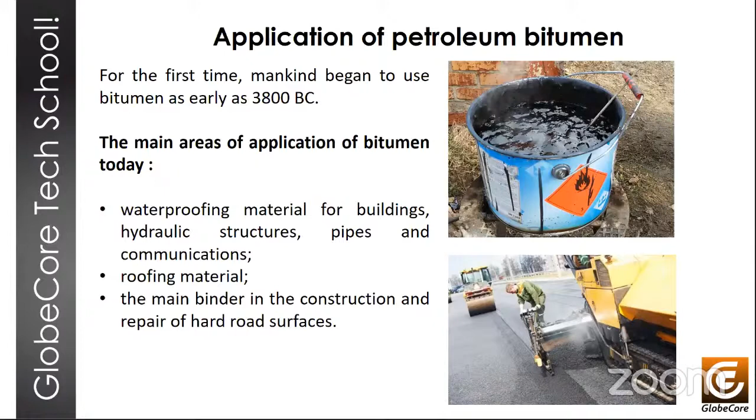So currently, bitumen is widely used in construction, in various industries, in agriculture, and for radiation shielding of all things. That's interesting. So the leading field, however, of bitumen application is the construction and repair of roads, buildings, industrial facilities, and also airports. Next slide, please.

So, okay, under normal conditions, if we are talking about a temperature of 20 to say 30 degrees centigrade, bitumen is a solid or highly viscous material that cannot be easily applied to things, right? It's solid. So in order to be able to use it, it must be converted into a liquid. And we can do this in one of three ways.

So first we can heat it, and between 100 to 200 degrees Celsius, bitumen turns kind of liquid, and it becomes more convenient to be mixed with mineral materials. So something like preparing asphalt concrete mixtures, or for application in its straight form on road surfaces when we do priming layers and asphalt pavements.

And asphalt concrete mixtures prepared with hot bitumen, as a rule, are stored, transported, and applied hot, with the possible exception of cold stored bitumen mineral mixtures, which are prepared with heating but stored and applied cold.

Another way we can have bitumen liquid is by diluting it or dissolving it with refined light oil products. So in this case, viscous bitumen is mixed with petroleum-based products such as kerosene or diesel fuel, gasoline, etc., and thus it becomes a liquid.

And the third way to have our bitumen in a liquid form is to emulsify it with water, adding an emulsifier, a surfactant. And when we emulsify bitumen, we get the emulsion, which remains liquid even under normal ordinary temperatures of about 20, 30 degrees Celsius.

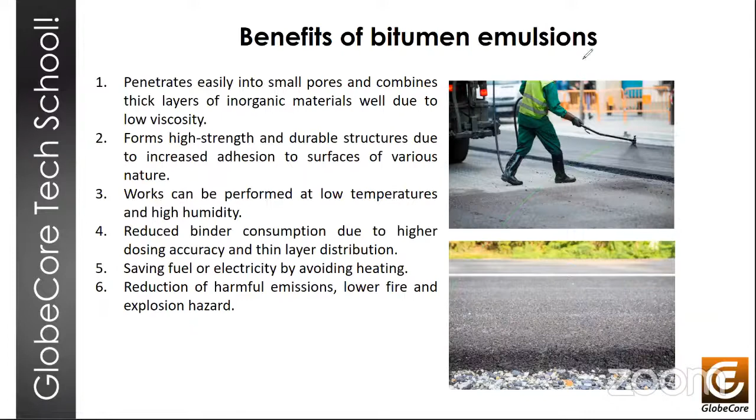Thank you. Okay, so what is this bitumen emulsion we speak of? So an emulsion is a dispersed colloidal system of two immiscible liquids, of two phases, one of which is distributed in the form of small drops in the other. In the event that one of the phases is water and the second phase is a non-polar or low polarity liquid, and for the purpose of this webinar, we're going to call it oil.

So bituminous emulsion, or water bitumen emulsion, is a dark brown liquid. It's made by dispersing bitumen in water. And this process is counteracted by the internal cohesion and viscosity of bitumen, as well as by the surface tension force, which resists the formation of a new interface. So when this mixing process is stopped, the emulsion quickly breaks and bitumen particles can merge, and this is called coalescence.

Okay, so to keep the components mixed and to keep the emulsion stable, an emulsifier is introduced into the emulsion, and it is a surfactant that prevents or slows down the separation of these two phases. The emulsifier molecule is polar. Its tail is compatible with bitumen particles, attracted to bitumen particles. And the other side of the molecule, its head, is repelled by other emulsifier molecules. So that prevents bitumen particles from joining together, which ensures the suspended state of the bitumen particles and ensures the stability of our emulsion.

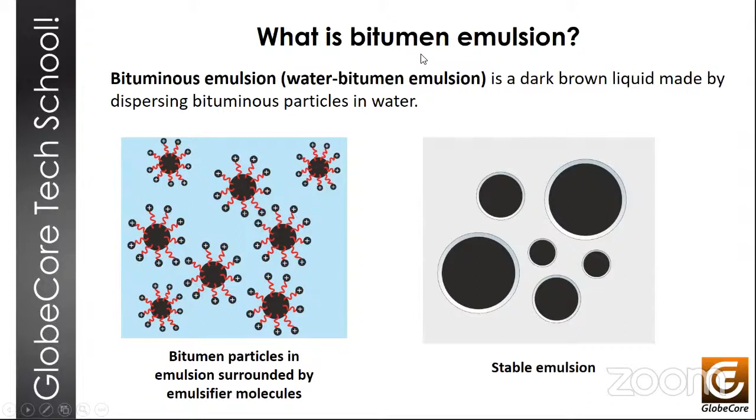So, okay, ingredients. In addition to bitumen, water, and an emulsifier, the emulsion may contain a stabilizer, acid or alkali, as the case may be. It can contain various solvents and thinners as well. So the acid is needed to improve the stability of the emulsion. And in most cases, we'd use hydrochloric acid or orthophosphoric acid, maybe acetic acid. And in the case of anionic emulsions, however, we use alkalis, not acids. Okay.

Stabilizers. Stabilizers are used to reduce the changes in the physical and chemical properties of the emulsion during storage and use. And that would likely be something like 0.05 to 0.1% of a 30 to 35% calcium chloride solution by weight. Solvents or thinners, that is a light oil fraction with a boiling point of 140 to 220 degrees centigrade. It's added in the amount of maybe 0.5% to 3%, and it's used to help create a homogeneous system.

Thinners, such as vacuum gas oils, oil fractions, etc., are added in a wide range, anywhere from 5 to 30% by weight, to increase the penetration of bitumen to the required value and to give the emulsion a stable liquid state. To improve the adhesive properties of the finished emulsion, we can add an adhesive additive.

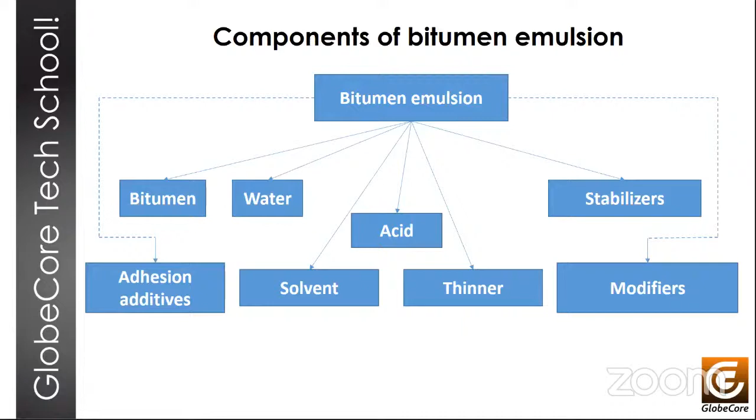All right, so let's classify bitumen emulsions. Depending on the nature of the liquid in the composition of the emulsion phases, we have direct emulsions, or oil in water emulsions. This is when bitumen droplets, the dispersed phase, are dispersed in water, which is called the dispersion medium, in the form of tiny droplets from 1 to 10 microns in size, surrounded, like I mentioned, by a layer of an emulsifier.

The opposite, indirect type is water in oil emulsions, when water is the dispersed phase and is dispersed in bitumen, which is the dispersion medium in this case. Water droplets in this type of emulsion are also stabilized by a layer of emulsifier. It should be noted that during production, both types of emulsions can form simultaneously, especially if using double-purpose emulsifiers. Such emulsions are sometimes called combined.

So what type of emulsion will eventually turn out will depend on the nature of the bitumen, the pH of the water phase, and the ratio of the volume of the phases. In order for the emulsifier to function as a surfactant at the oil-water interface, to be adsorbed, it must have an affinity of the same order for both phases. If this condition is not met, the emulsifier will move from the interface to the phase for which its affinity is greater.

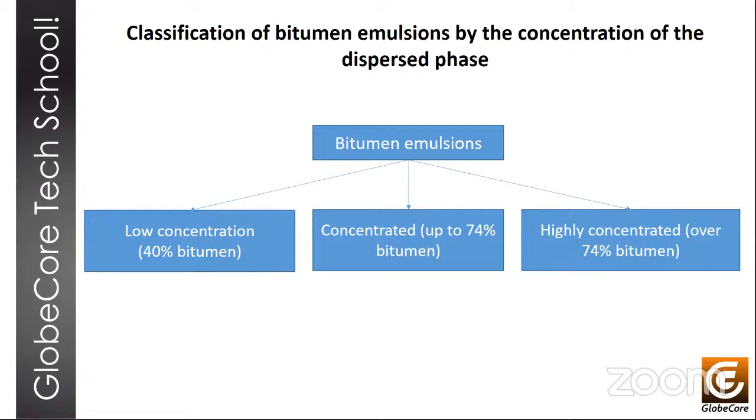Also, we can classify emulsions depending on the nature of the emulsifier. Direct type emulsions are usually divided into the following classes. There are anionic emulsions, where an anionic surfactant is used. There are cationic emulsions with the cationic surfactant. There are amphoteric emulsions with double-purpose emulsifiers, and these are compounds that ionize and act differently in water solutions

depending on the pH. They exhibit the properties of cationic surfactants in an acidic solution, and they become anionic surfactants in an alkaline solution. Then there are non-ionic types, which have surface active properties, not dissociating into ions in water solutions. And there are emulsions based on solid emulsifiers.

Now, emulsions of the inverse type, depending on the nature of the emulsifier, were usually not separated into classes. But now, when it became possible to choose from a wide range of various emulsifiers, we can also divide them into surfactant emulsions, solid emulsifier emulsions, and emulsions based on non-ionic emulsifiers.

And this type of inverse emulsion is still under development, but it has prospects, especially in the case of using an emulsifier that is sensitive to temperature change during the preparation or application of the emulsion. So there are some promising applications there.

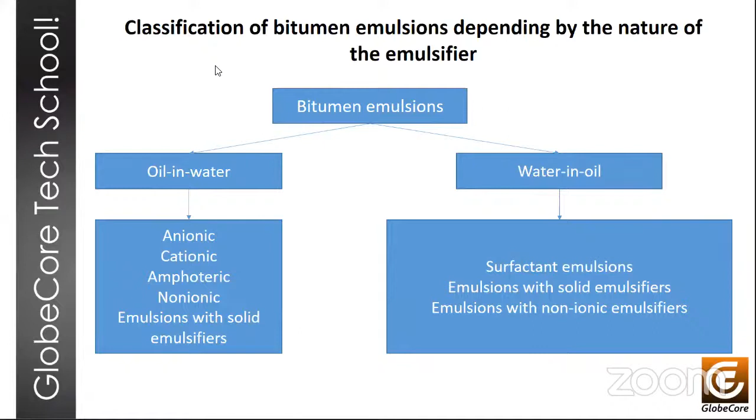All right, so in road construction practice, the most commonly used emulsions are direct type, oil in water, primarily anionic or cationic. And therefore, the classification of these emulsions, for example in the United States, is based on such an important characteristic of their properties as the rate of mixture formation based on these emulsions.

Or the rate of breaking of the emulsions. So basically how soon the bitumen released from the emulsion when it breaks achieves its original properties and forms a continuous film. So we can have rapid setting, RS, medium setting, MS, slow setting, SS, and superstable emulsions, QS.

And for convenience of classification, a special international system of symbols for the designation of an emulsion has been developed, and it makes it easier for users to choose the required type and grade of bitumen emulsion.

And we're talking about standards such as the ASTM D977, D2397, there is AASHTO M140, and M208.

So first of all, the type of emulsion is indicated by the rate of its breaking or setting. For example, a rapidly setting emulsion will be designated RS. Then either the letter C is put in front of the type of the emulsion, which would mean a cationic emulsion, or no letter is put before the designation, and that means that it's anionic. So RS would mean a fast anionic emulsion, CRS would mean a fast cationic emulsion.

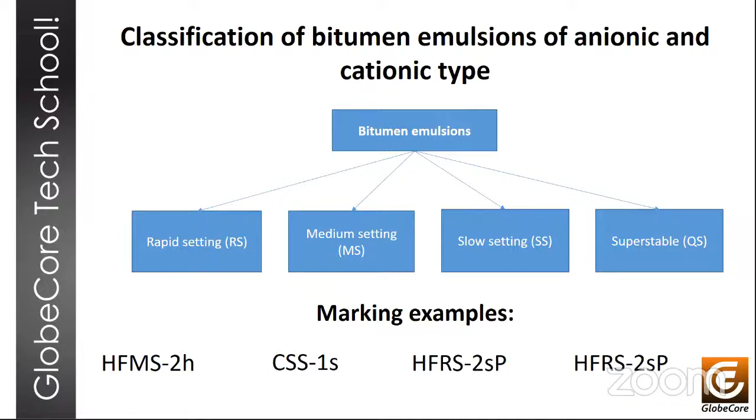The purpose of bitumen emulsion is determined by its properties. It easily applies to various surfaces, including vertical surfaces, and due to its low viscosity, it penetrates into the pores of materials. It also mixes very well with mineral materials, such as crushed stone, gravel, sand, or mineral powders of various kinds, firmly binding them together.

Bitumen emulsions perform two main functions. The binding function is the use of an emulsion to bind mineral materials and their particles together, which is a prerequisite for the production of asphalt mixtures. There is also the protective function, which serves to protect materials and surfaces from the effects of aggressive materials or media, such as water or salt.

In road construction, bitumen emulsions are used for the construction of crushed stone surfaces and gravel roads by impregnation method, by pre-mixing, and by mixing on the road itself. They are also used for the construction of asphalt concrete pavements, and for treatment of dirt roads if necessary.

Bitumen emulsions can also be used for a wide range of road construction works. This includes surface treatment, cold emulsion mineral mixtures produced both in the mixer at the factory and by mixing straight on the road, cold storage mixes, tack layers, pothole patch repairs, and creation of thin film protection layers.

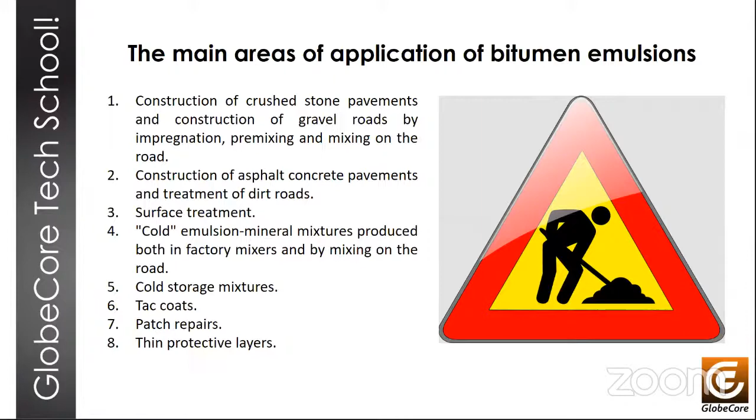Extensive experience shows that the most effective use of bitumen emulsions is in the so-called cold technologies for the construction and repair of roads. First, we'll talk about priming coats.

Priming is the application of an emulsion by spraying it onto the surface in the form of a thin layer, which ensures reliable adhesion of the asphalt concrete mixtures to the underlying layer. For most types of pavement, such as concrete or various basic and bottom pavement layers, the creation of this binding layer is not only desirable but necessary.

One type of priming is the application of the so-called initial coating, when a slow emulsion with a bitumen content of 55 to 60% is sprayed onto a granular base to prepare it for the application of an asphalt concrete mix. Depending on the properties of the base, the specific amount of emulsion applied would be maybe 0.4 to 1.4 liters per square meter.

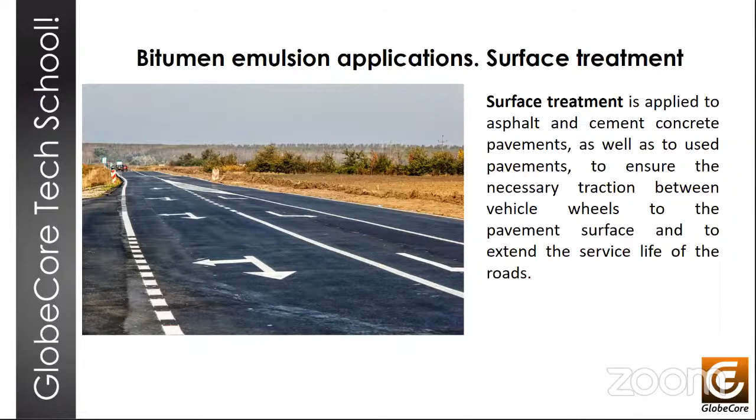Crushed stone impregnation is another use. Construction of structural layers, bases, and coatings by multiple scattering of crushed stone of various fractions, compaction of such stone, and also impregnation with bitumen, usually twice, with a slow breaking emulsion that contains 50 to 65% bitumen.

And there are patch repairs. The use of bitumen emulsions greatly simplifies the repair process. It allows work to start in early spring and end in late autumn, especially in moderate climates like where we are. It can be used at air temperatures as low as 5 degrees Celsius.

When using emulsions, it becomes possible to use them on wet materials, because cationic bitumen emulsions ensure fast formation of the binder film. They show high adhesion of the film to the surface of most aggregates, and overall we get good quality repair works. The emulsion consumption in this case would be 1.3 to 1.6 liters per square meter for each centimeter of depth cut from the original surface.

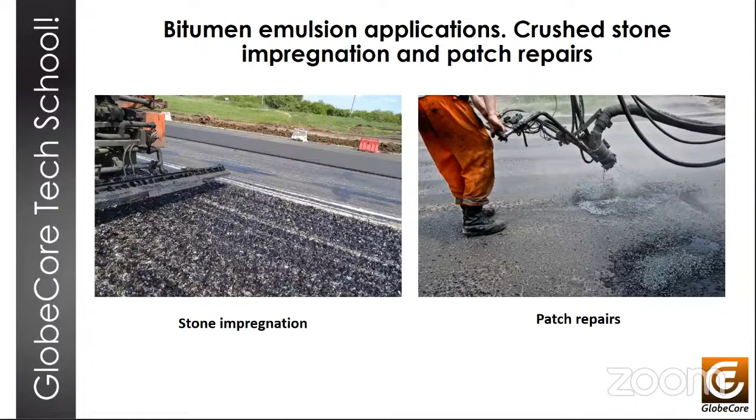In addition, emulsions are widely used in other technology processes that include slurry seal, microsurfacing, multimac, and cold recycling. Slurry seal is a method of applying thin layers over existing pavement. This cold mixture consists of a dense mineral material with a filler, usually Portland cement, mixed to a uniform consistency with a bitumen emulsion and water.

After the so-called drying time, the surface becomes impermeable to water, and the coefficient of traction is improved. So the old coat is protected from water, oxidation, and further breaking and deterioration. The thickness of the slurry seal coat is 1 to 1.5 times the size of the stone grain, so up to about 8 millimeters. This mixture uses material homogeneous in terms of particle size distribution.

When increasing thickness to improve mechanical properties and shear stability, latex modifiers are applied. The mixture has high surface tension and is self-leveling. With the help of slurry seal, slight rutting and any longitudinal deformations of the profile can be compensated and repaired.

Since there are practically no voids in the hardened mass, it resists compression really well under traffic. After the coating is done, traffic can be resumed after about 1 to 4 hours.

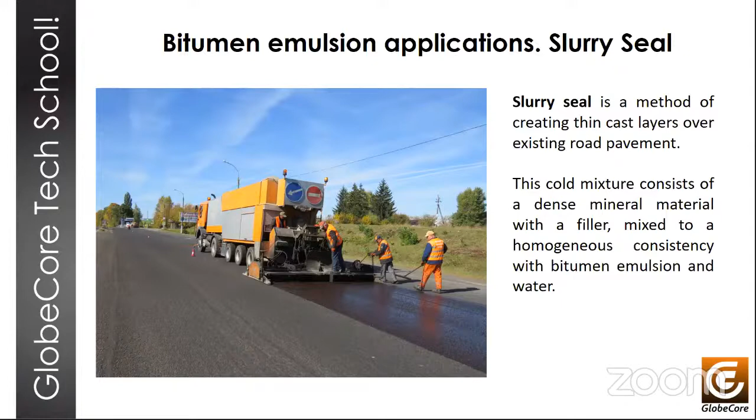With microsurface technology, a larger stone material is used, and the bond is actually stronger than slurry seal, so the coating can withstand fairly heavy loads without deformation. For better shear stability, again, latex is introduced into the mix.

Microsurfacing is used to eliminate rutting, fix minor profile defects, and expand road shoulders. Basically, in any case where slurry seal can be used, microsurface can be used as well.

Microsurfacing emulsions could be called fast traffic emulsions, as they set in just 30 to 60 minutes. If the coat is created in 2 passes, the first layer closes the cracks and smooths out the surface, and the second coat is recommended to be applied no earlier than 1 day later.

When the repair is completed, traffic can be resumed in about 30 minutes. However, for 1 hour, the driving speed should be limited to about 40 kilometers per hour. Both slurry seal and microsurfacing imply a fairly quick application at a speed of 3 to 6 kilometers per hour, and both technologies allow quick restoration of the road surface.

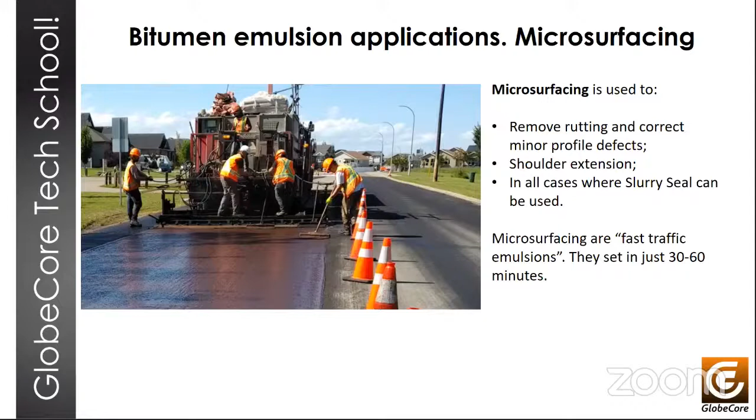Both act as a protective layer to prevent wear on top of the road, and can withstand fairly heavy loads and traffic intensities. Their average service life is about 3 years.

Next is Multimac. It's a thin layer coating that functions as a protective layer or wear layer. It cements the damaged base, fills all cracks and voids with the bitumen mineral mixture, and evens out deformed pavement. The mixture is prepared and distributed by a special stacking machine equipped with a computerized dosage system for the ingredients.

Some of the other emulsion applications include crack sealing in road pavement. Cracks are filled with an emulsion mixed with fine-grained sand, leaving a few millimeters to the surface. After settling and solidification, the remaining volume is filled with straight emulsion without sand. Sand is then applied to the surface to protect that patch material from being carried away by traffic wheels.

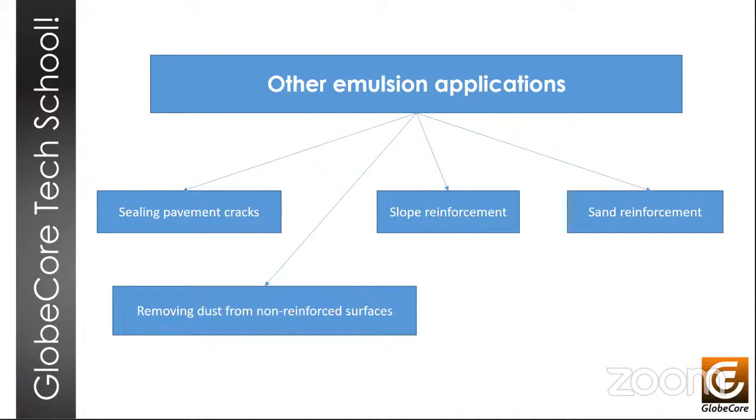Bituminous emulsion can also be used to reinforce slopes and sands, to prevent dust formation on unreinforced materials, and in many cases emulsions can be used as waterproofing materials. Now, emulsions are good, right? So how do we make them? The next slide will tell us how.

Bituminous emulsions are usually made using a colloid mill, but they can also be prepared using other dispersing devices. In a colloid mill, an emulsion is produced by passing a mixture of hot bitumen and a water phase between a rotating rotor, basically a disc or cone, and a non-rotating stator. The rotor, just like the stator, can have slots or teeth to create a turbulent flow of the material.

For the preparation of bitumen emulsion, we can have batch or continuous production plants. The batch production process consists of at least two stages. The first stage is the preparation of the so-called water phase, or soap phase, as it's sometimes called. The actual production of the emulsion is the second stage.

A water phase is prepared in a tank into which we supply heated water, emulsifier, acid or alkali, and any other additives necessary to the product formula. The resulting solution is then mixed.

At the stage of emulsion production, bitumen and the previously prepared water phase are fed in a certain proportion to a colloid mill. If the addition of a solvent to bitumen is required, then a bitumen portioning tank is also needed, or the solvent may be injected and dosed directly into the bitumen stream continuously.

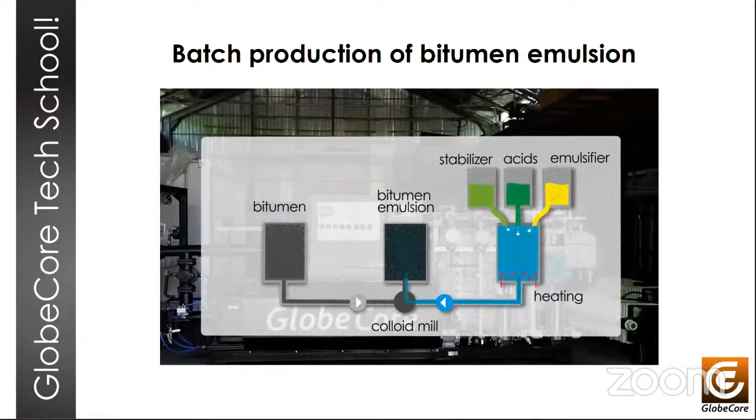In a continuous production process, water heating and dosing of all materials are performed continuously using separate portioning pumps for each material, and batch tanks are not used. Instead, the water phase supply system is designed to provide a sufficient time interval for the reaction between the chemical additives to neutralize and dissolve until the water phase combines with bitumen.

This process requires the use of automated controls with flow meters for the dosage of all materials, with the exception of acid, the supply of which is controlled based on the measured pH of the water phase.

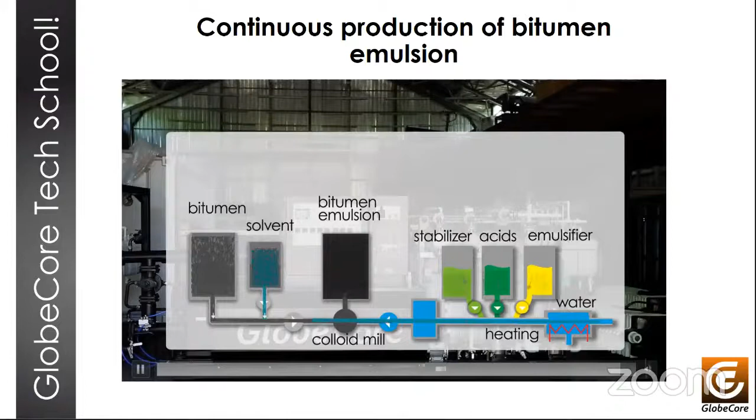When making an emulsion, it's possible to use various polymer modifiers such as latexes, SBS, or other additives to bitumen. In this case, it becomes necessary to equip the plant with additional assemblies and implement appropriate technical solutions. Latex, for example, is sensitive to external factors that can cause it to break down, clogging pumps or pipelines. With SBS polymers, it's usually necessary to output the emulsion at a temperature above the boiling point of water, which requires overpressure, and then cooling of the product before it's fed into the storage tank with a transition to normal atmospheric pressure.

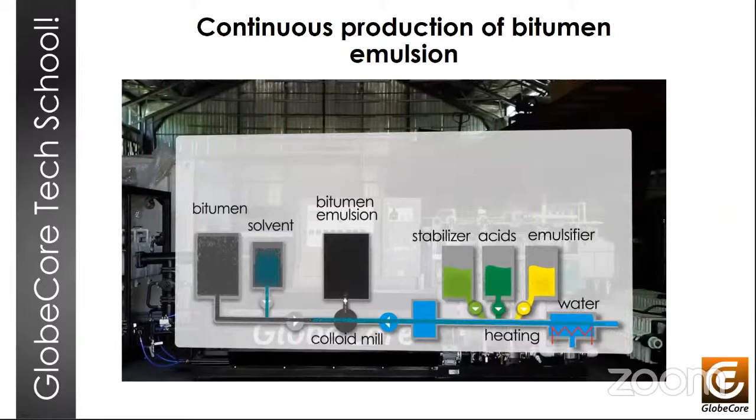Today we'll show you two batch process machines made by GlobeCore, with a capacity of 2 cubic meters per hour and 8 cubic meters per hour of emulsion production.

Here you can see the specifications of these plants.

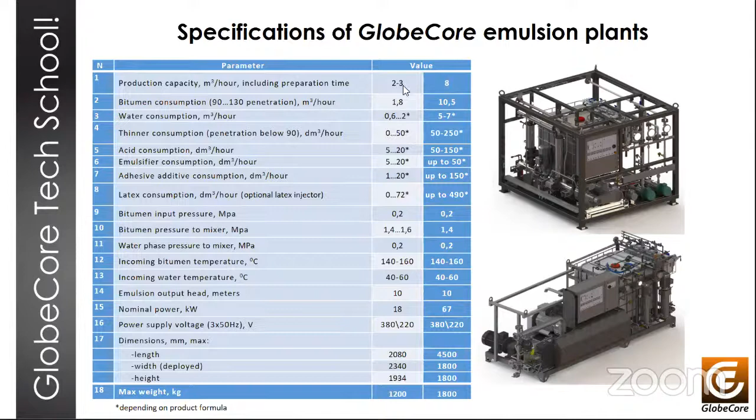Both of these plants are semi-automatic, meaning they have automation but not the whole process is automated, so some operator involvement is still required. They consist of several independent sections connected by pipelines but mounted on the same frame. The plants can be divided into sub-units: an emulsion preparation unit, a water phase preparation unit, and also the control panel, a control device.

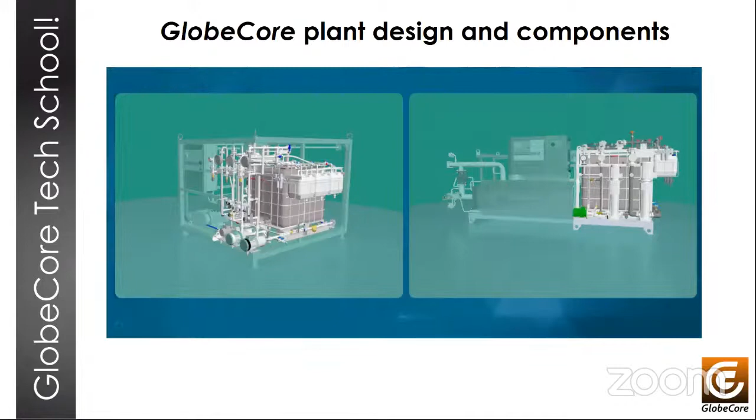The emulsion preparation unit is basically a three-stage mixer with a pipeline system with valves, a bitumen pump, and of course a rotary mill. The components are equipped with heating jackets connected to a heating agent system, which ensures the heating agent passes through the system and maintains the process temperature required for the bitumen emulsification process.

The water preparation unit consists of a blend intake tank connected to piping systems that has indicators for visual control of the liquid. There are control valves, instrumentation, shut-off valves, and all of that is mounted on the same frame as the emulsion preparation unit - you'll see a lot more of this when we show you the actual machine in our production facility. This unit is also equipped with temperature and pressure sensors.

There are several temperature measurement points: at water supply, at blend supply, at bitumen supply to the blend, at the point of feeding bitumen into the mixer, and at the product output. We also measure pressure, with points at the inlet of the machine, after the bitumen pump, and just before the colloid mill.

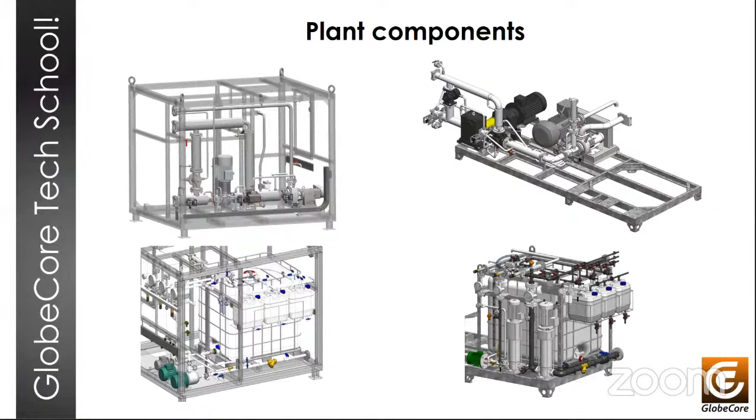The plant can operate in two modes: manually, which is usually done to check and adjust the individual components of the plant or to adjust the process formula, and automatic production of water bitumen emulsion. The mode is chosen by pressing the mode button on the control panel.

The PLC controller manages the operational unit in automatic mode. In case of an automatic stop or shutdown, if monitored parameters go beyond operating limits, an alarm message is displayed on the front panel of the controller. The plant remains stopped and cannot be restarted until the operator confirms the message has been received.

The controller also manages the parameters of the water bitumen emulsion production process. Signals are received from the meters that work in tandem with the pressure and temperature sensors, and the current values of these parameters are displayed on digital indicators of the corresponding meters.

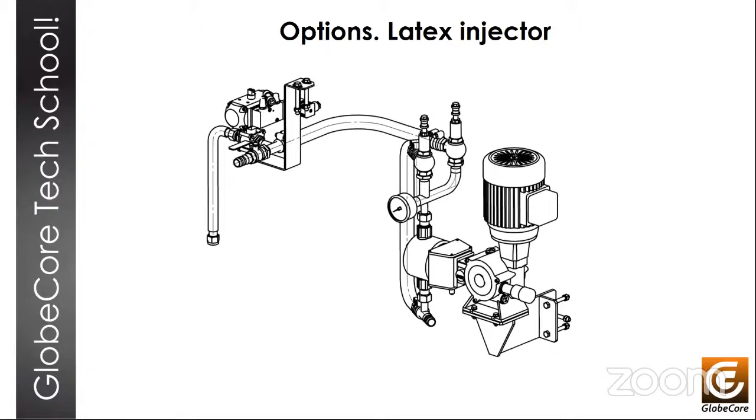All right. So the principle of operation of GlobeCore bitumen emulsion plants is based on sequential mixing of components in hydrodynamic mixers at a certain pressure and temperature. Due to its unique design, the hydrodynamic mixer provides instant mixing of the components in the stream due to the sheer kinetic energy of the bitumen stream, more like a jet. It goes in at high speed, and that allows us to make the mixer rather small.

So this principle is used for mixing the components of the water phase, of bitumen and solvent, as well as the bitumen phase and the water phase in the end. Okay. So the main part of the machine is this. This is where the main mixing is done, and the mill serves the purpose of homogenizing the product later on, and we'll get to that in just a second. Next slide, please.

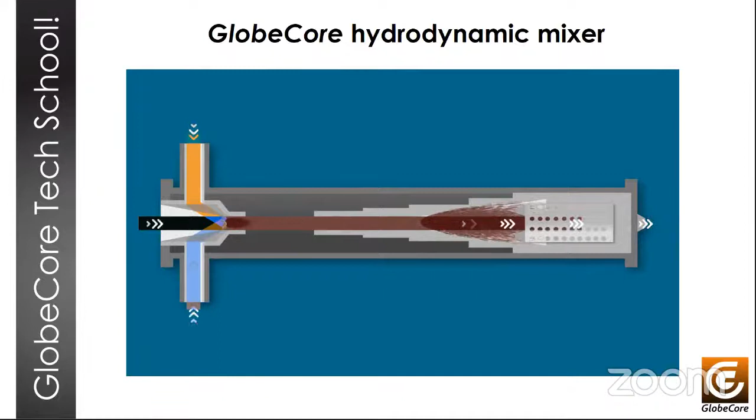And this water phase is prepared immediately before mixing with the bitumen phase, and it flows from its mixer to the mixer for the bitumen emulsion. The advantages of this method are precise proportion adjustment, a significant reduction in mixing time, and the elimination of big mixing tanks for homogenizing the product. So therefore, we can get a fairly small-sized plant all in all.

The supply of each component is constantly adjusted during mixing to ensure the output of the finished product with the required parameters as per the necessary product formula. Another obvious advantage of this technology is that the plants can work longer from one batch of water without the need to use large containers for blending, since the concentrate of the water phase is increased in volume by as much as 5 times before entering the emulsion mixer.

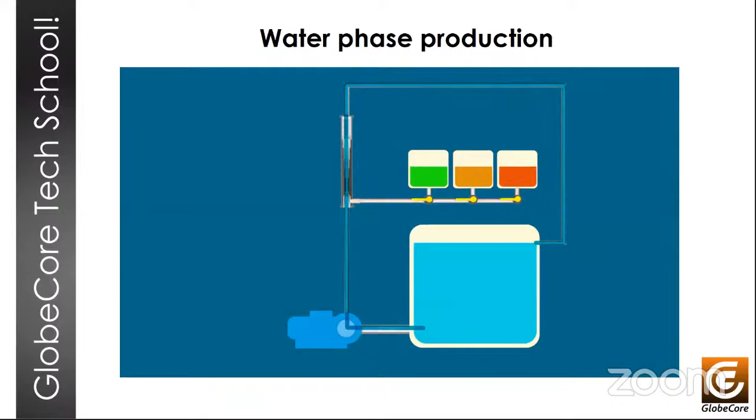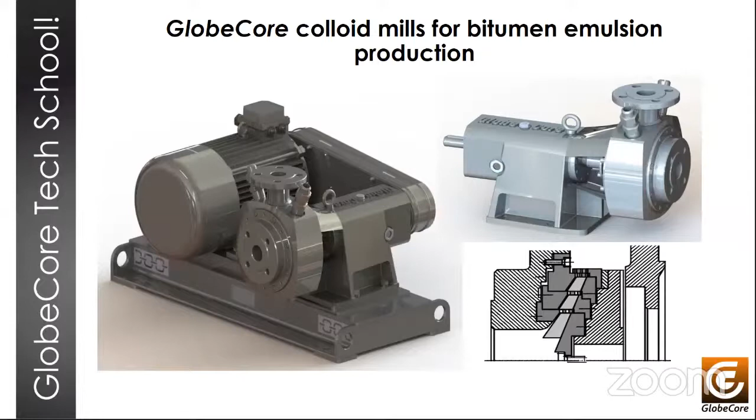Okay, so this is a GlobeCore colloid mill. These mills are driven by belt drives, which allow the necessary peripheral speeds with a relatively small size. The tool itself is made of corrosion-resistant steels, which maximizes its wear resistance and service life. The design of the stator-rotor system is nozzle type, and it allows for the maximum number of very small streams of liquid, which we then disperse into droplets for the process and the subsequent stabilization of the product. Next slide, please.

All right, so let's look at how it works. So before starting, all bitumen pumps and pipelines in the plant are warmed up, heated to at least 110 degrees Celsius with the oil from the heating system that is provided by the heating station.

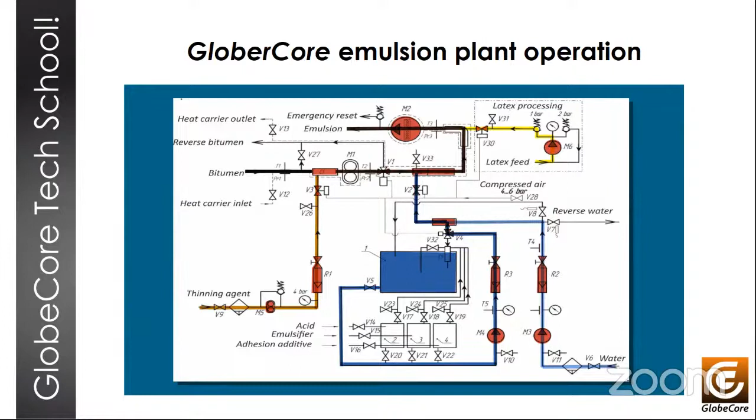And at the outlet of the mixer, we can inject latex into the mix by the M6 pump through the V30 valve if necessary. And then when the emulsion is done here, it passes through the M2 mill for final stabilization and homogenization. And last, the finished emulsion is collected and stored in a tank at a temperature of 40 to 60 degrees Celsius, right? And next slide now.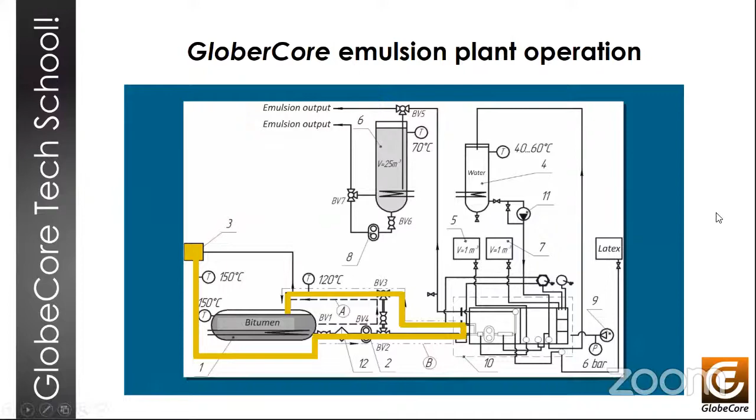So yeah, that's a nice little plant, and it's been operated in quite a few countries and quite a few places around the world. And these are some of the pictures of plants that are successfully run in Europe, in Asia, in Africa, in South America. So quite a few of them out there. Okay, and why this is so successful. Okay, next slide, please.

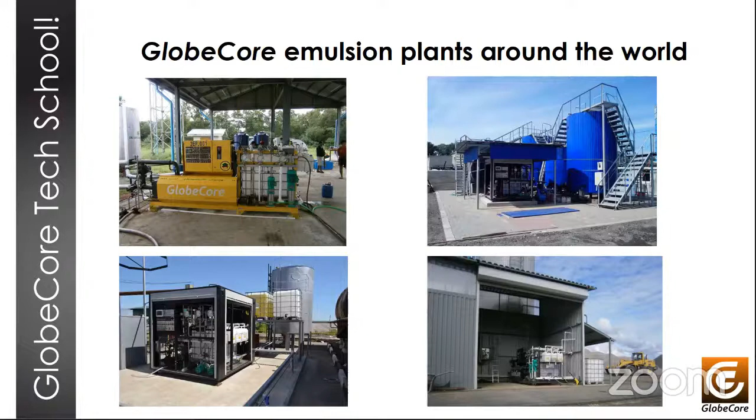Because it's got advantages, right? So some of these are: the plants can produce practically any type of emulsion. It can be cationic emulsion with different setting rates, anionic emulsions, modified emulsions. The plants ensure pretty high quality, and stable quality rather, of the resulting product. There is ease of maintenance because there is a minimal amount of mechanical mixing devices, i.e. mills, and these are replaced mostly by hydrodynamic mixers with no rotating parts or drives.

The equipment is rather small, as you've seen. There's a small footprint. It allows for a lot of flexibility in the production formula and a high precision of ingredient dosage. It can operate for a long time off one water phase batch because we dilute that concentrate immediately before emulsification. And of course, there is the GlobeCore quality that's been proven over decades. And the client can select a required production rate plant with ease. There is a wide product range.

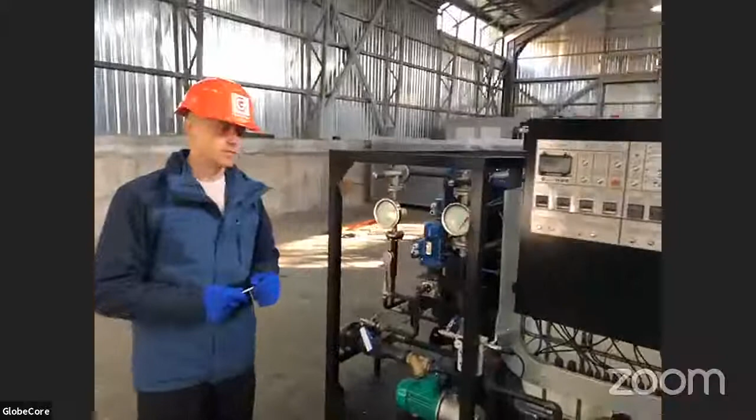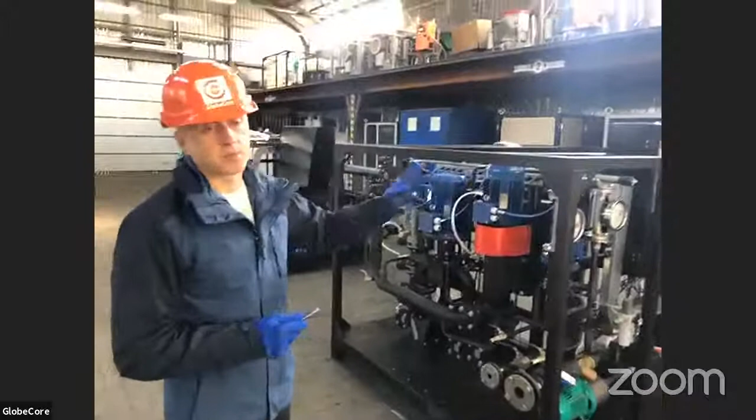So these are batch process machines, and we will begin by showing you the machine for 1 cubic meter of emulsion production.

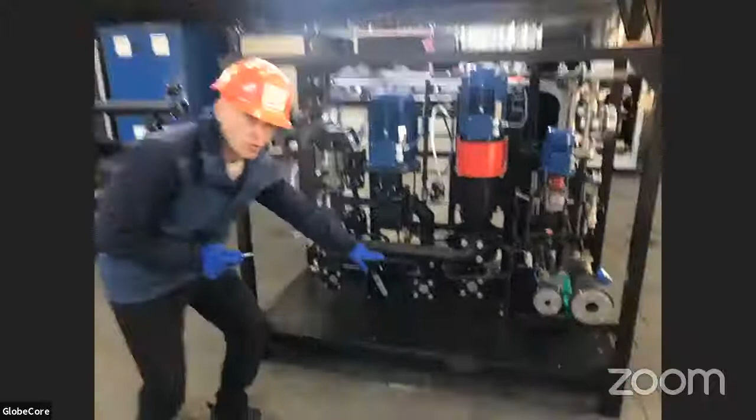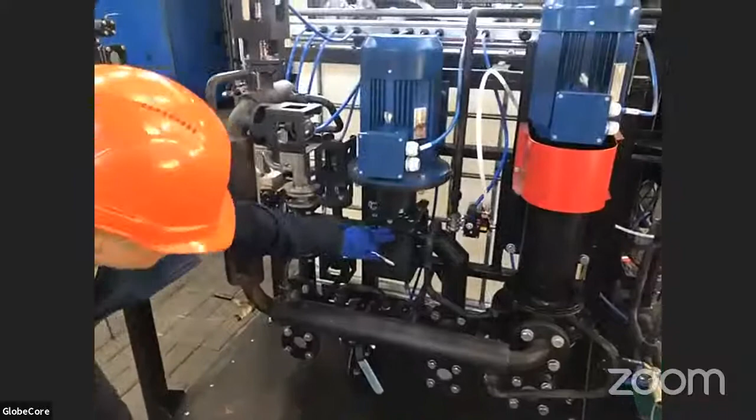First of all, let's show you the bitumen section of the machine on this side of the machine. This is the input for bitumen. This is the bitumen input line, the bitumen supply pump here.

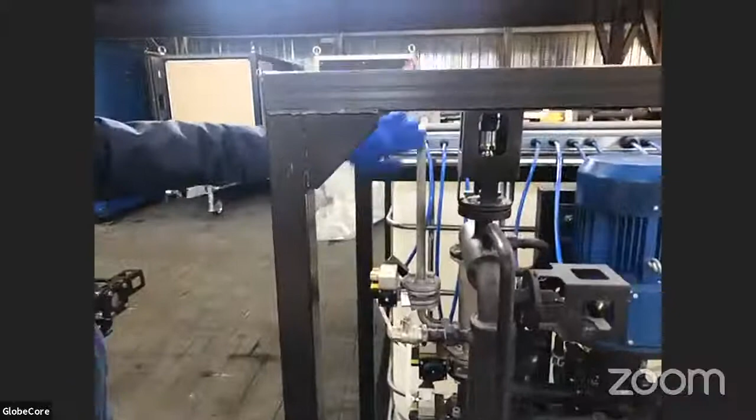And water phase is supplied into this hydrodynamic mixer along this line at the same time.

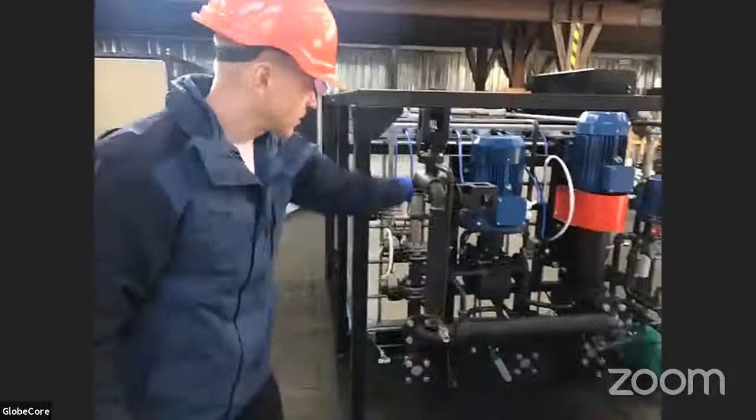And after this mixing, the product flows along this line for homogenization into the colloid mill.

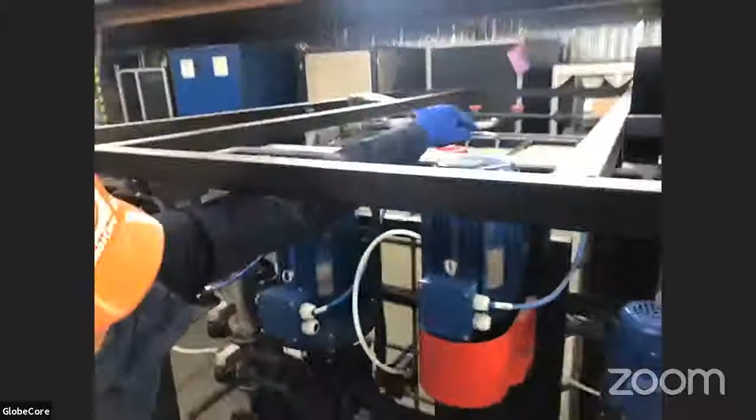If we follow this line for the thinner here, this is what we'll see.

There is a gear pump to supply that thinner, also a valve and a flow meter. We can adjust the recipe by regulating the valve and observing the flow meter readings, basically adjusting the supply using this regulation valve and looking at the needle on the flow meter.

Next I want to show you the water phase system. It is presented here, this is where it is.

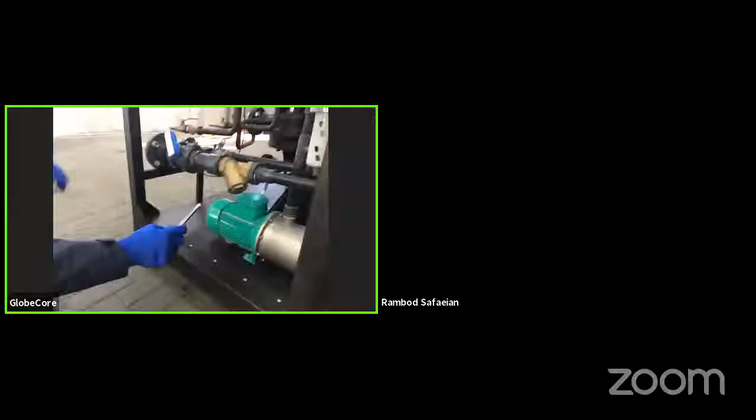What I wanted to say about the water phase line: all of this functional work is provided by one pump. This pump here actually serves three functions.

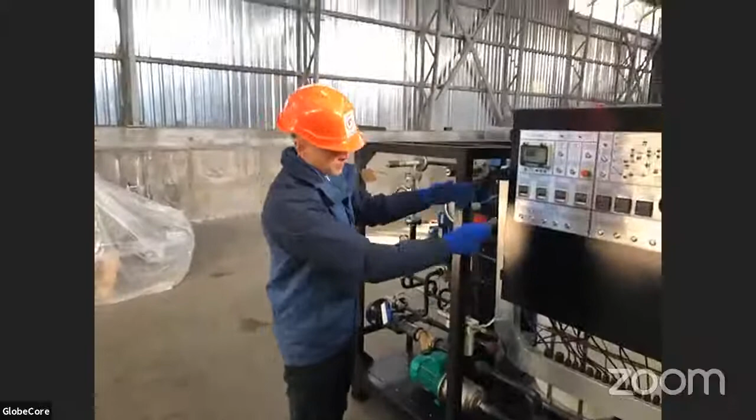First, it supplies and circulates water in the external tank. Second, it mixes and supplies water into the blend tank, the large white tank included with the machine. And third, it supplies the ready water phase, the finished blend, into the system which mixes it with bitumen.

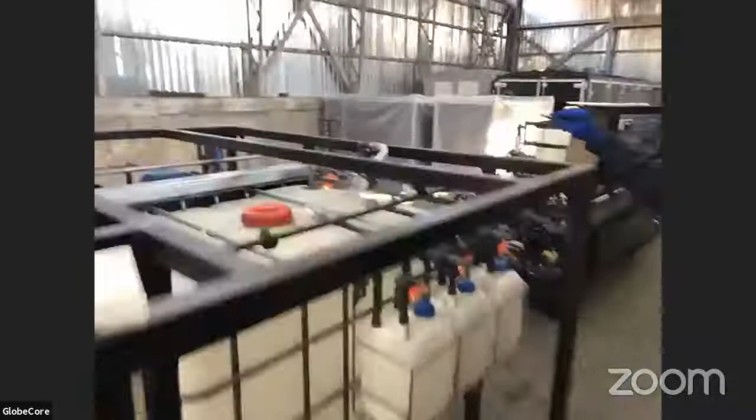Next I want to show that all the ingredients which will be introduced into the water are mixed in the hydrodynamic mixer, which is located here at the top, above this tank on the far side of the machine.

Regarding the ingredients, we have three tanks here which can contain acid or alkali, stabilizer, and emulsifier.

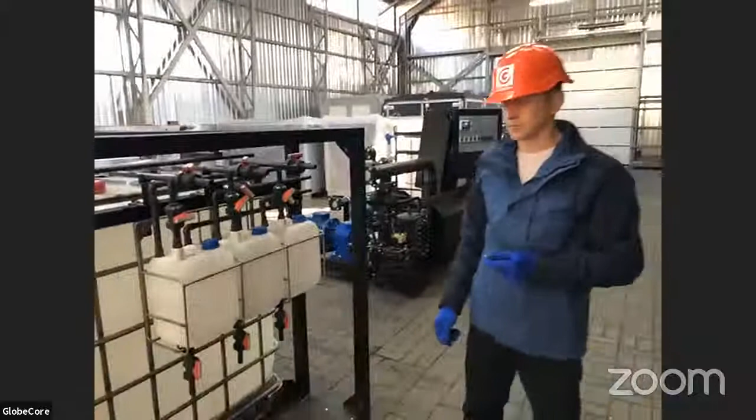These components are supplied into the hydrodynamic mixer simply by turning these manual valves. The components are drawn into the vacuum zone in the hydrodynamic mixer, where they are mixed with water.

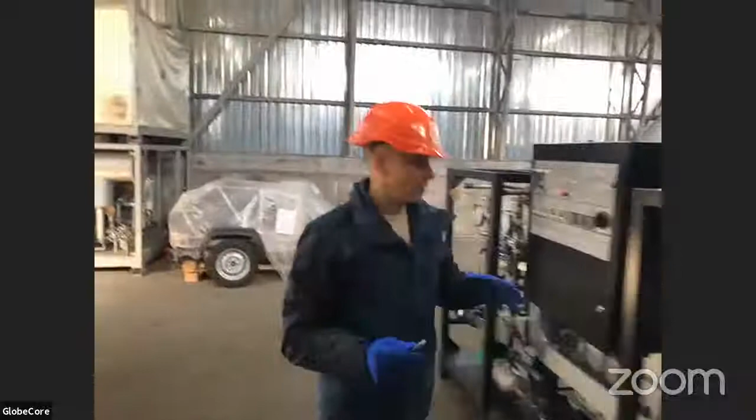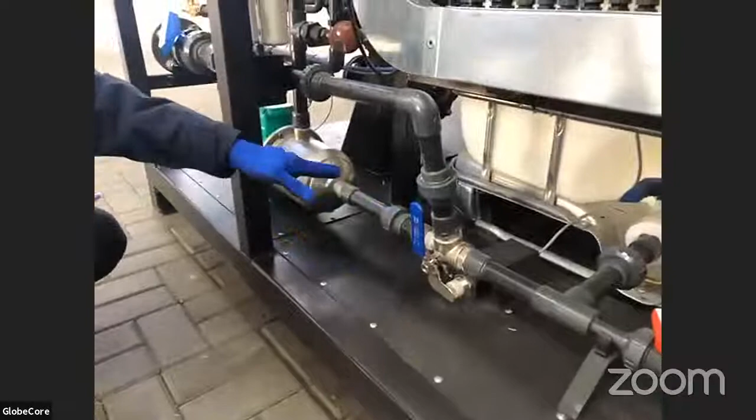When the water phase is ready for supply into the bitumen system, meaning the whole blend has mixed, we simply turn a valve here down below to supply the water phase into the bitumen mixing line.

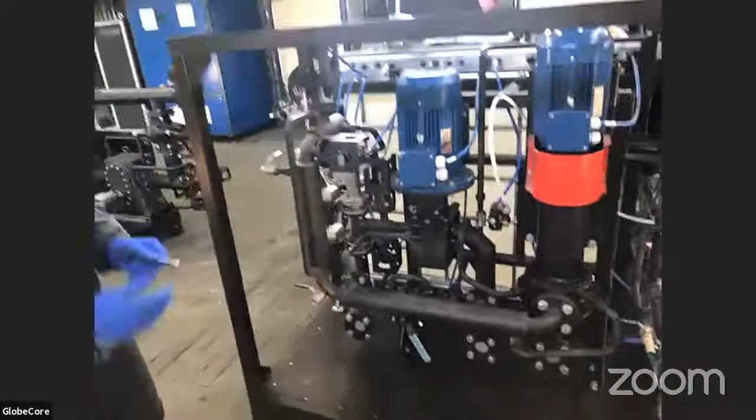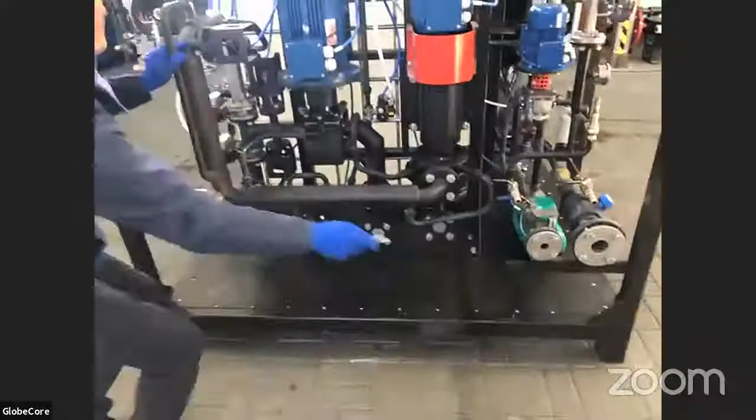As already mentioned, the water phase together with the bitumen is mixed in the hydrodynamic mixer. After the hydrodynamic mixer, the product is fed into the colloid mill, and at the output we have the finished product.

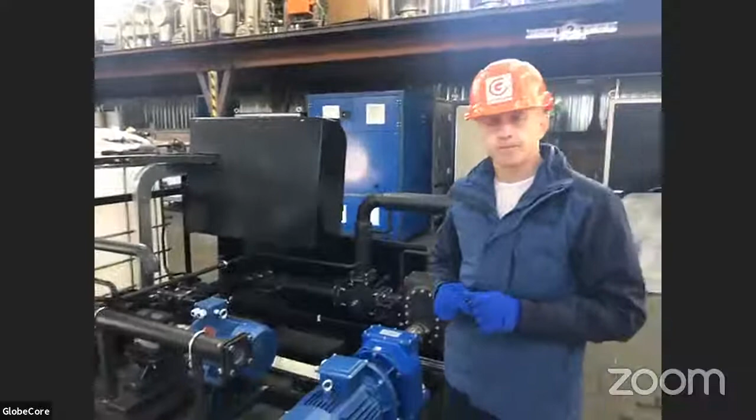Now I want to show you another installation, a larger machine with capacity up to 8 cubic meters per hour.

I want to clarify that we took this machine from the workshop before final assembly, so some additional components might be missing, but the main units needed for demonstration can be shown. This machine is in the very late stages of production for a client, so it's good for our demonstration purposes.

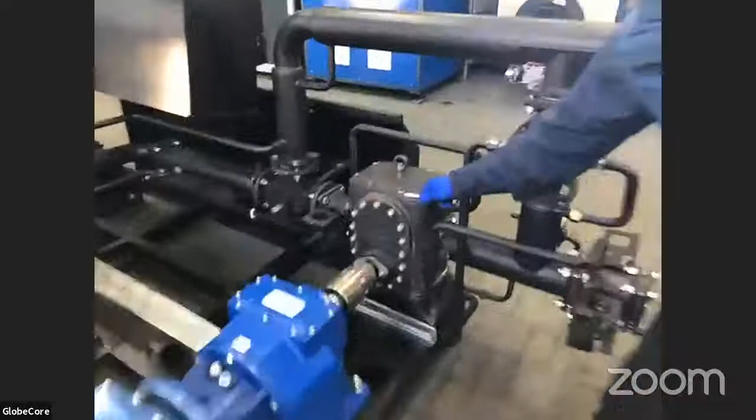In this machine, just as in the previous installation, there are the same mechanisms: the bitumen supply pump here, and the hydrodynamic mixer here.

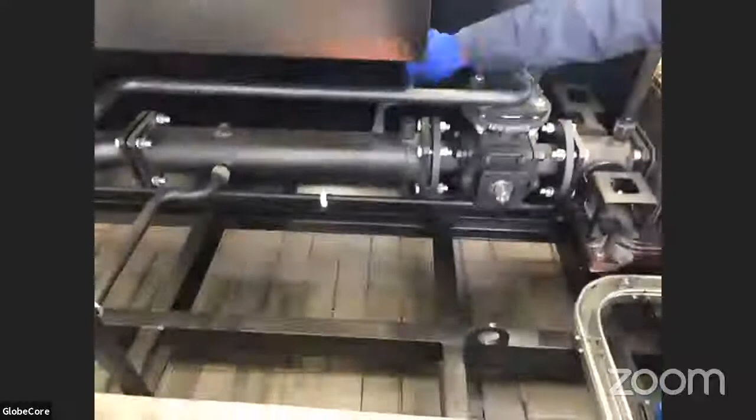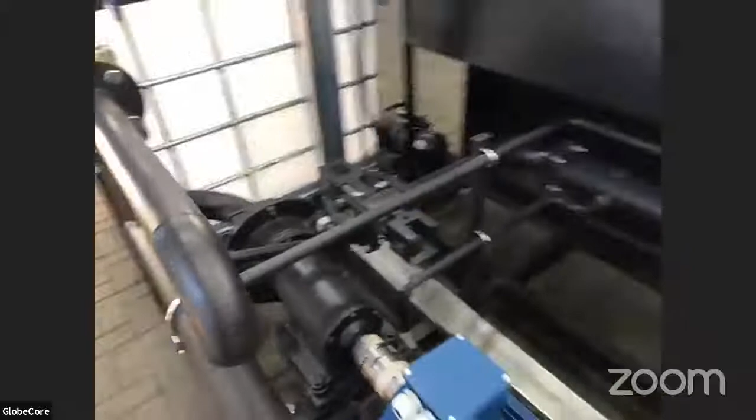After mixing, the water phase is supplied here, coming in from this line. After mixing all the components, the product is fed to the colloid mill for final homogenization.

We have the output of the already finished product. And this is the product output line here.

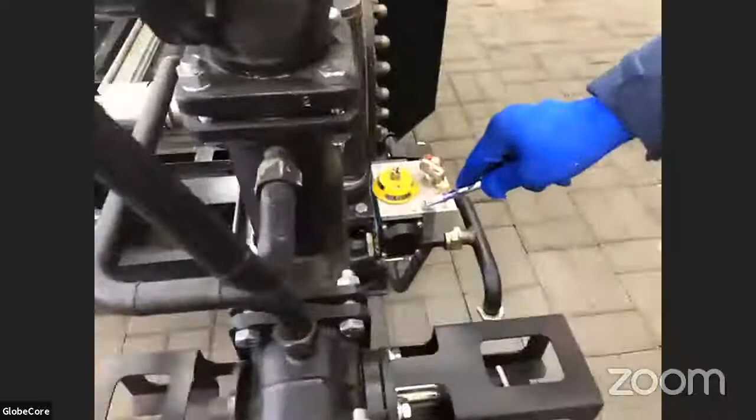Also regarding the thinner, here we have a valve for thinner supply. It works on the same principle as the smaller machine and supplies this thinner into the bitumen pump, right before the bitumen pump.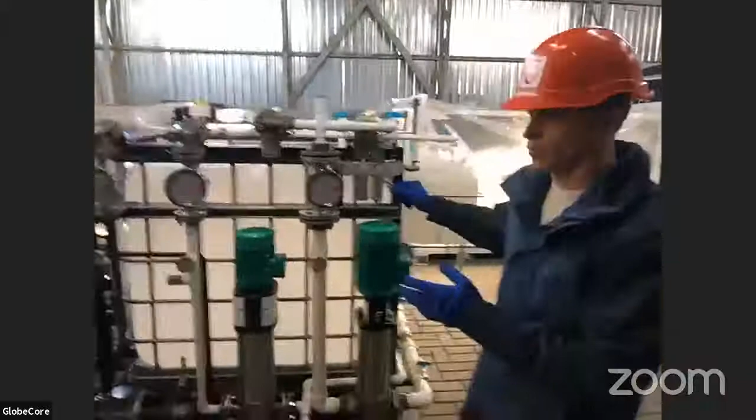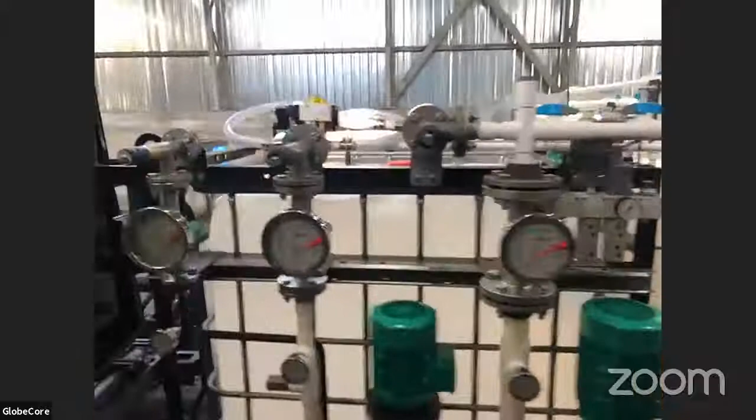Here I want to note a small difference: we have two pumps, a somewhat different design from the previous smaller machine, which had only one pump.

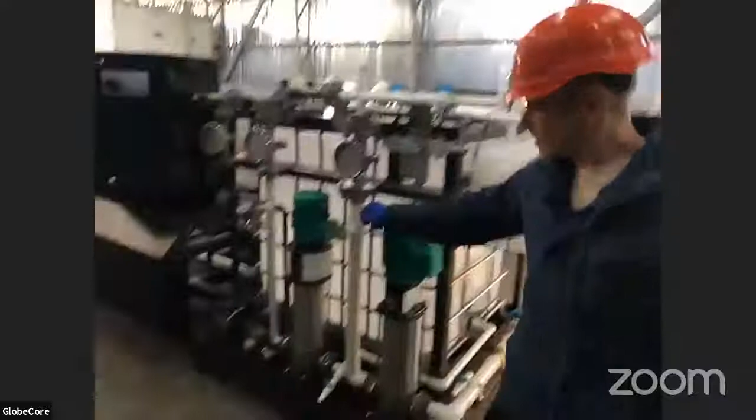This pump facilitates supply and circulation of water from an external tank. And the second pump is what we call a blend pump.

The second pump mixes the ingredients and water to prepare the emulsion, and supplies this concentrated blend along this line to production. In automatic mode, these two pumps operate together.

The first pump supplies the concentrate and also draws in fresh water to dilute that concentrate to the required concentration for production, and supplies the blend into production.

Of course, our installations are equipped with a number of sensors, as is the first installation - these are temperature and pressure sensors. Obviously, both systems are equipped with process parameter sensors: pressure and temperature sensors.

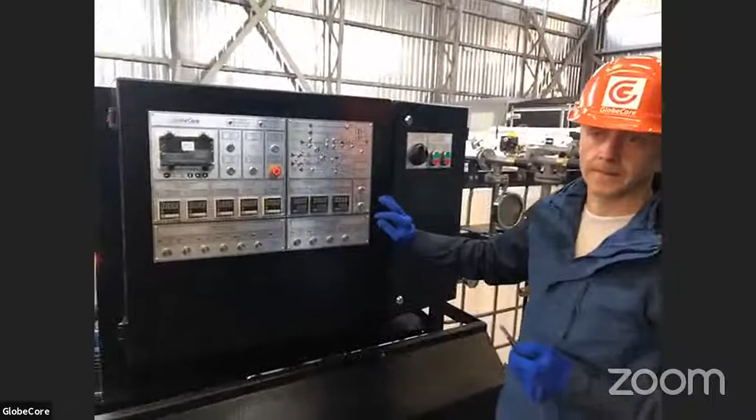This allows us to control the process and avoid any emergency situations by monitoring temperature and pressure during the process. These sensors allow us to make the process safe, efficient, and precise, avoiding potential hazardous situations with overpressure or overheating.

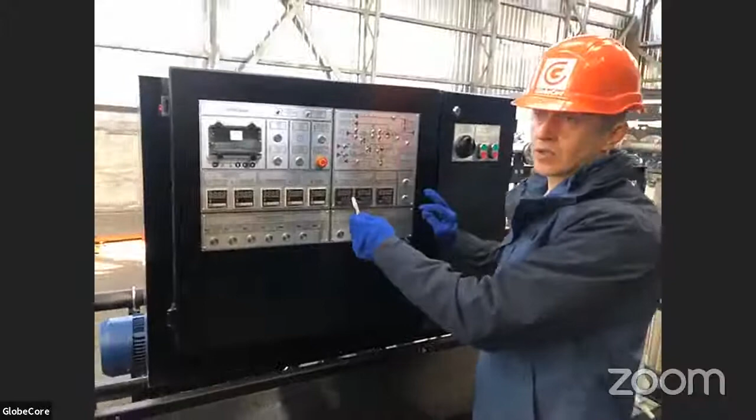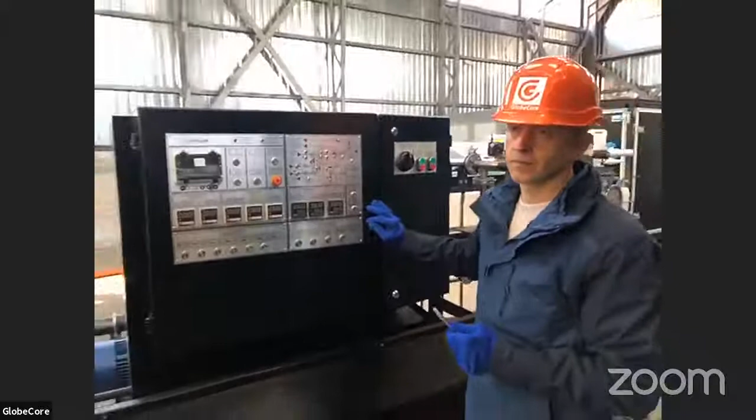It's very important to monitor the temperature of the emulsion, because it must not exceed the boiling point of water. And accordingly, the pressure in the system must also be monitored.

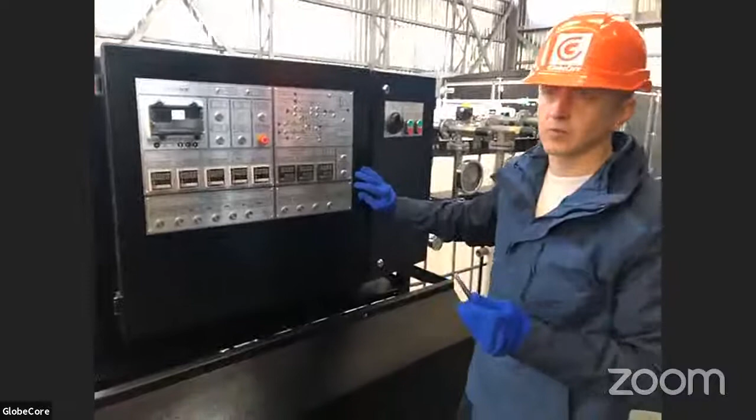Why? Because the machines operate under high pressure, around 14 atmospheres. The pressure is very important to track because machines operate at an elevated pressure, something like 14 bar or so.

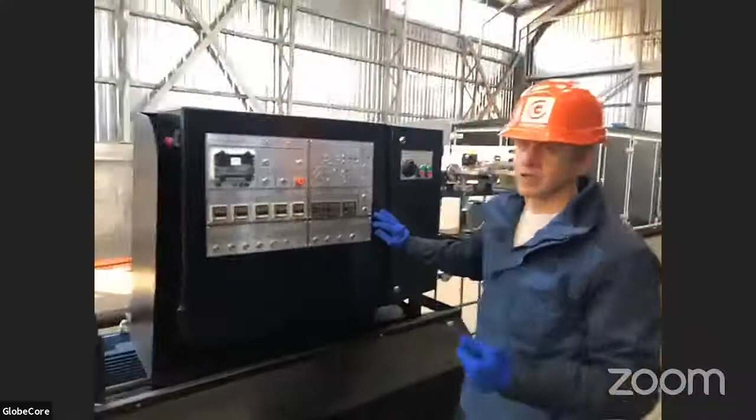In case of any emergency situations, of course there is an emergency stop, which we call the emergency stop.

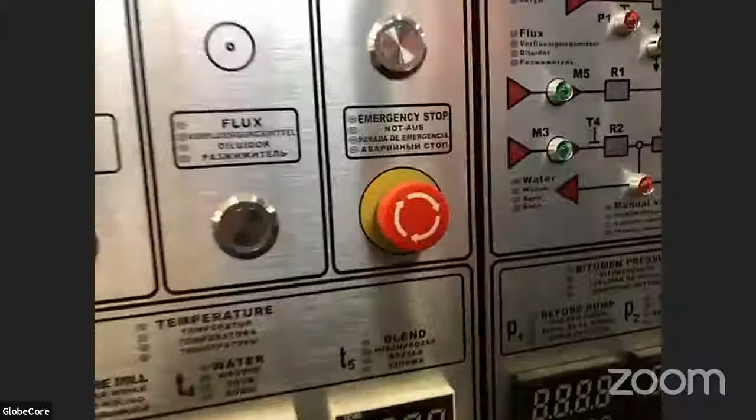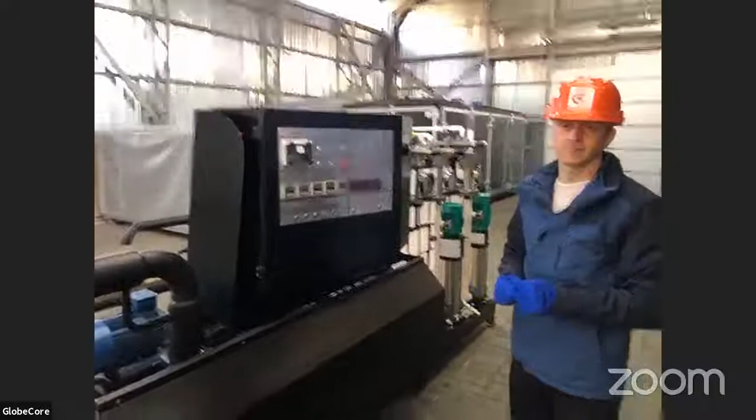But through operator monitoring of the indicators, the machines work well and nothing should happen. It's rarely used, if ever, because the sensor measurements allow the operator to control and manage the process and prevent any emergency or breakdown.